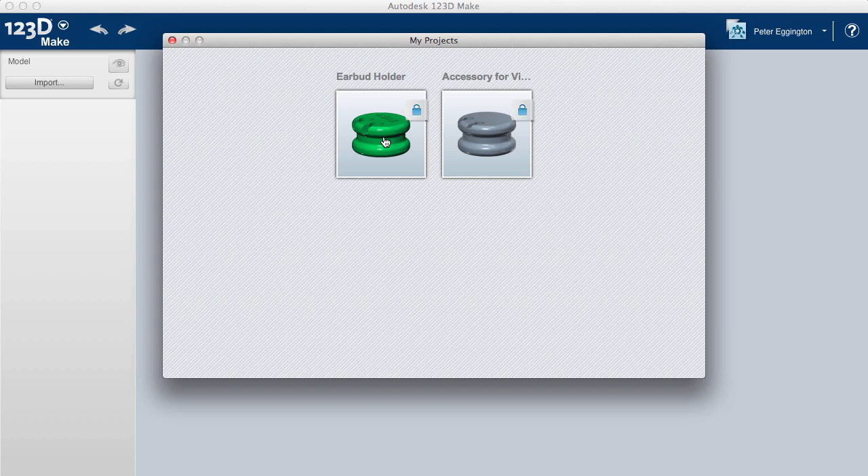To do that, I'm going to go down to Open, and open from my projects, and look in the browser window that opens for the earbud holder we've been creating. I'm just going to click on it, and that's going to download and import it into the 123D Make window.

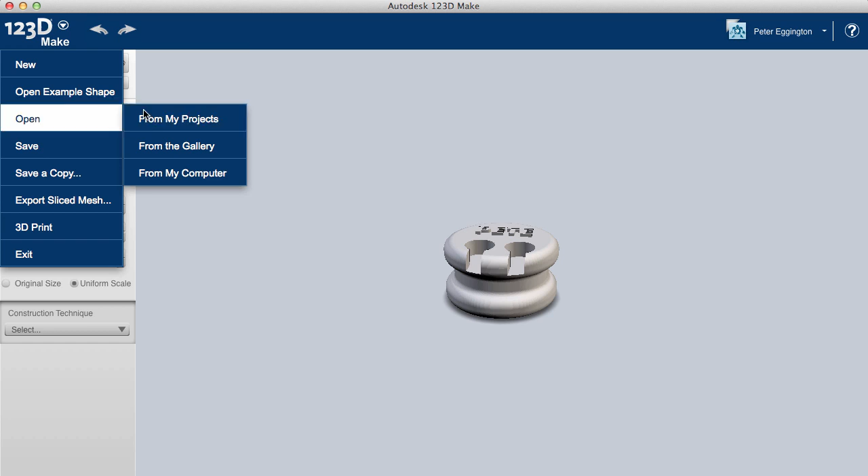Now, if you'd not saved it in 123D Design to your projects area, you can still access your model by going to Open from my computer, and then browsing for the location using Explorer or Finder to find the file you'd created. When you click on it, it'll import just like the other one has done.

It works fairly similarly to the other program. If I hold the right mouse button down, I can spin round and orbit around my shape.

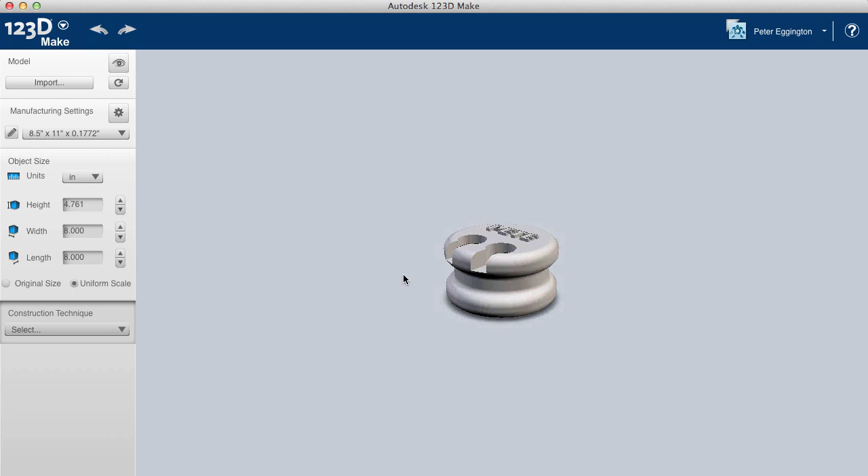By default, the program comes with a few materials already pre-input, but I guess like me you're going to want to start adding a few more, so I thought I'd show you how to do that, as it's not that straightforward. I've already created one here, acrylic 3mm, but I'll delete that one in a moment and show you how I've created it. It's probably the kind of material you're going to use a lot of if you do quite a bit of laser cutting at your school.

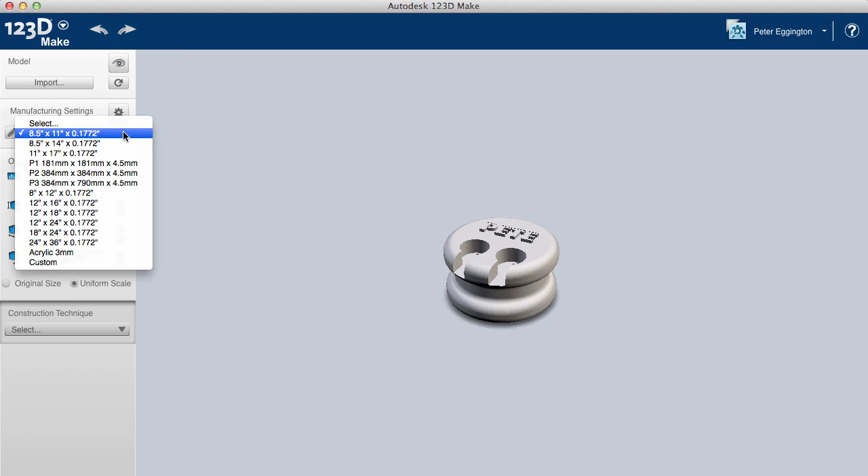So in order to make a new material, we're going to go to the little pencil icon, and I'll delete that one to start off with. The list on the left are the pre-input materials that come with 123D Make. To make a new one, we're going to go to the little plus sign, which is add new material, and it comes up as unnamed, so I'm just going to double click that, and type acrylic 3mm. Then we need to edit the properties of that material.

So for units, because I'm over here in the UK, we're going to go for millimetre. And the material size, that's going to be the sheet size you're going to use to cut this. It's probably useful to go for the bed size of your laser cutter here. So the height, I know most will do at least 400, and lengthwise we're probably looking at something like 600. But if yours are slightly different in your school, you can just edit those - if it's 600 by 600, or 450 by 450, you can just change those values to match your laser cutter's bed size.

And for thickness, nominally we're going to go for 3mm here. However, depending on your supplier, you might find this varies from 2.9 to 3.1 - the place I usually buy mine from does vary by colour sometimes. So it might be that you want to set up a material with different colours and their corresponding thicknesses, just to make it slightly easier for pupils and students.

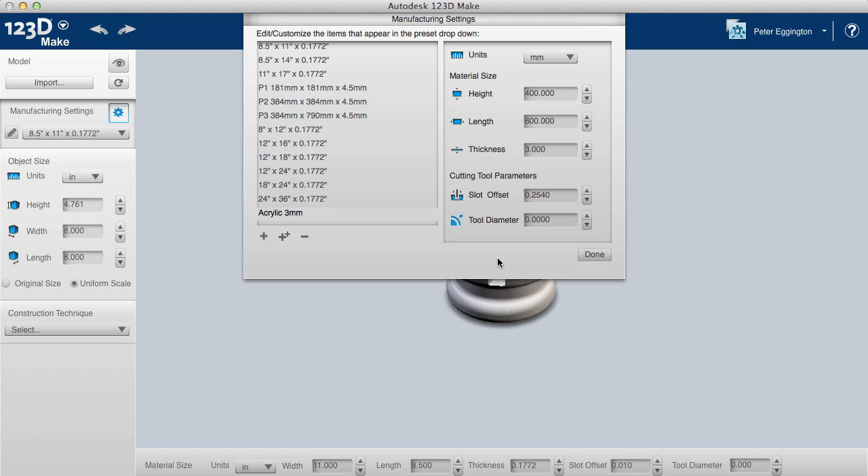The other two parameters down here, the cutting tool parameters, we're going to leave by default. The slot offset is just the amount of gap either side of the piece you're going to put in, and we'll see how it's going to slice it up in a moment, but I've used quite a few examples and this default value seems fairly decent. So when you're happy with that, we're going to click the Done button, and that's now input this new material.

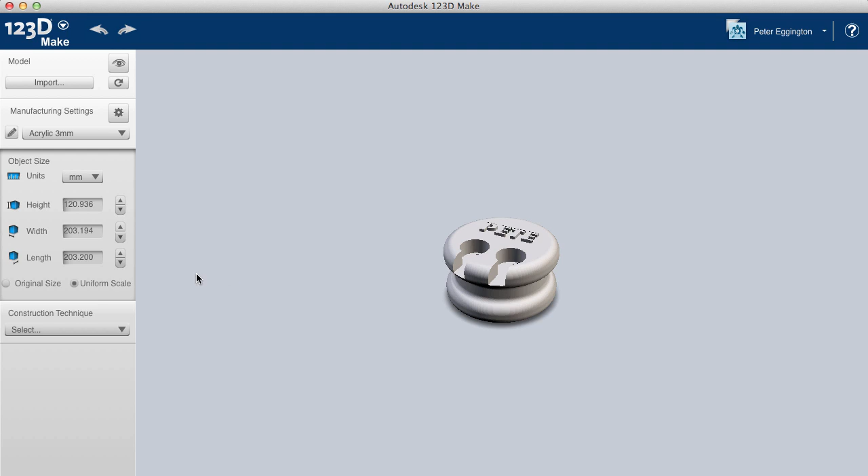So if I go back to my drop down box, I can see at the bottom I've got this acrylic 3mm, and the object that it's pulled in, we'll just reset it to millimeters, and you can see that it's not actually the same size as what I created in 123D Design, and that's because it's pulled it in using a uniform scale. So I'm going to select the original size button, and that's now pulled it in with the same size that I created, so it should be 60mm in diameter and something like 34, 35 high, and you can see that's the right sort of values we're expecting in the three boxes to this side.

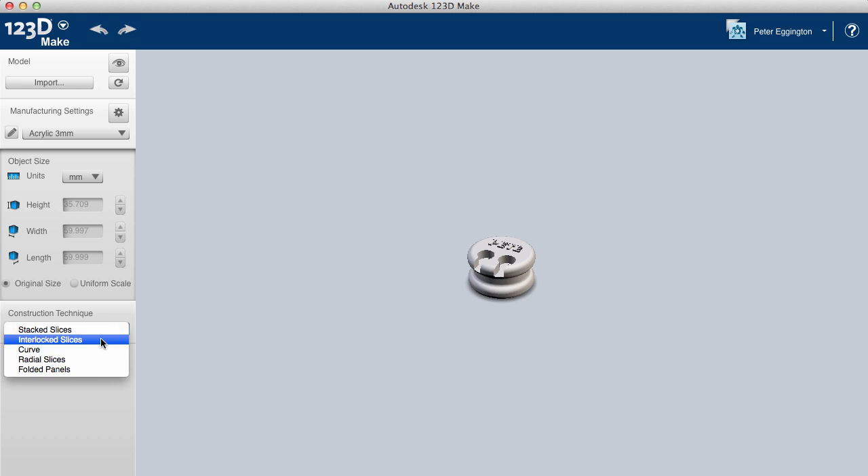So what we need to tell 123D Make is the way we want to construct our model. There are a few different options here. I don't want to go through them all in this video because it'll just go on for hours, so we'll just look at the stacked slices, which is probably one of the more common ones. If I rotate, you can see this program has sliced up our model into various slices of 3mm acrylic and laid them out onto a 600 by 400 sheet. It also numbers each one for you, so when building it up, it's simple to find the next piece because you just count upwards, and there should be 15 parts altogether.

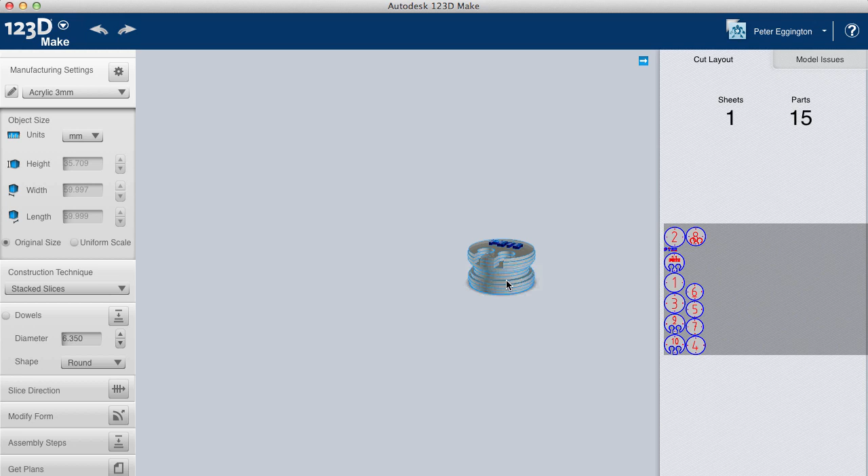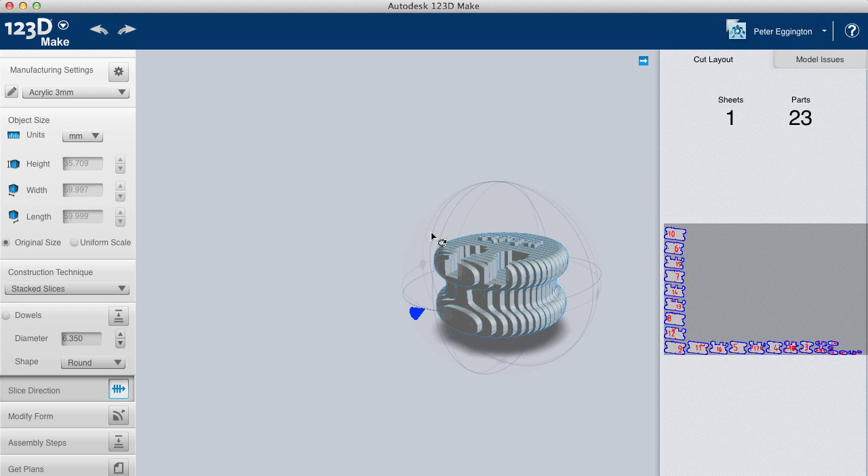What we can do as an option, by default it'll slice in this orientation, so it'll just stack them up on top of each other. It might be for some models that we want to change this slice direction and have it coming from this way instead. Now for this model it's probably not the optimum idea, but depending on the model you've created, you might find one orientation works better than the other. So I'll just try and put that back to what it was before.

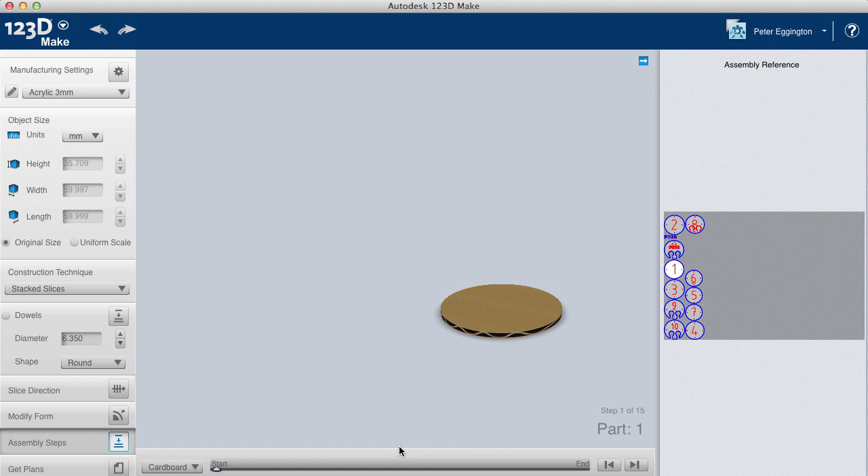We can also go down to the assembly steps, and if I go back to the start on this item and scroll through, it shows you the steps and also highlights which one it's asking for next. You can see if I go back, we've started out with piece number 1, 2, 3, and so on, going up. The blue lines, I guess you could push some bits of wire through or something to try and hold them all together, although if you're using cardboard like this model, you're probably just going to use some type of glue to stick it all together.

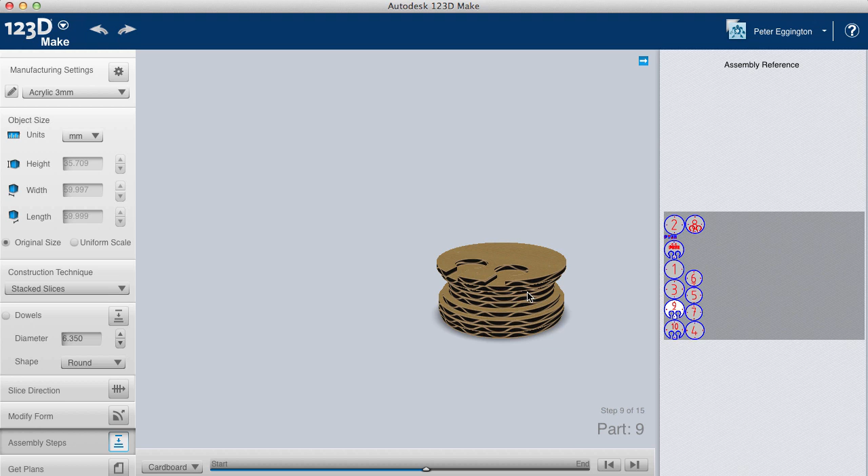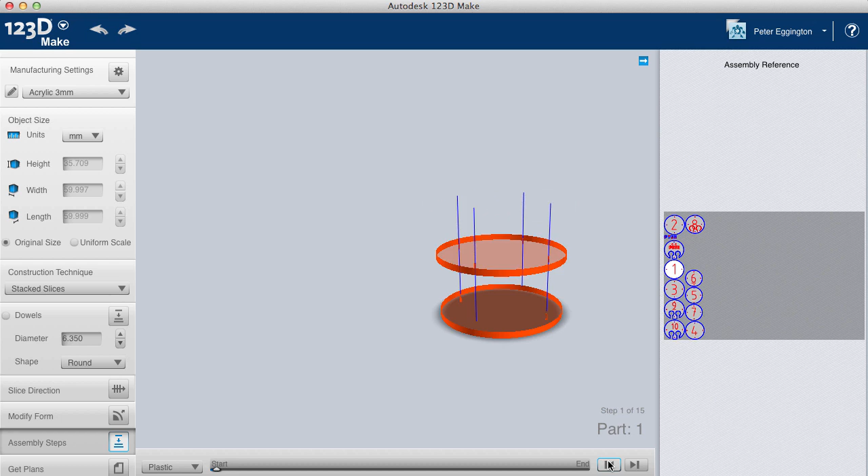So we'll just go through to finish that off, and you've now got your model done in cardboard. There will be an option here if you want to change the material just so it looks slightly more realistic, and you can play that back through, so when you do come to build, if you're struggling, you've always got this little animation to help you out.

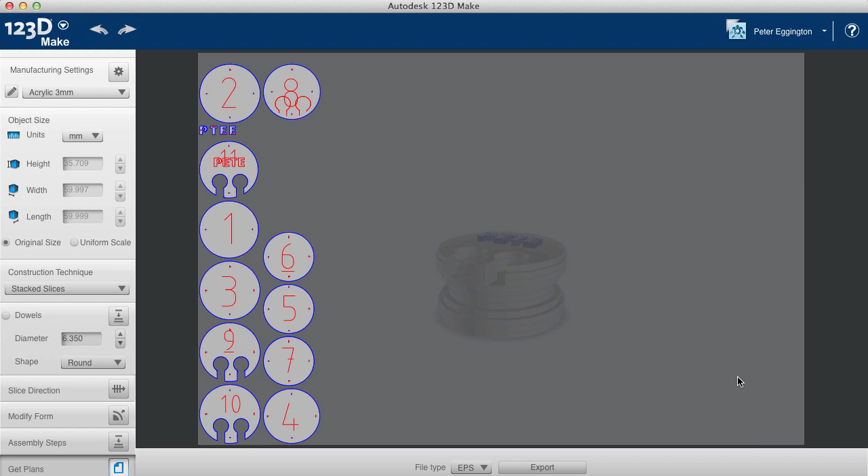There's also the Get Plans button, which lays it out on your screen and allows you to export it as either an EPS, a PDF or a DXF file. If you're using lasers, it might be useful to be able to export a DXF. Most lasers will probably recognise an EPS format as well, and I've not really come across any that do PDFs, but either there's some around or it's just another way of transporting it around. So a few little steps in there, and we did say we'd just look at maybe a few more construction techniques.

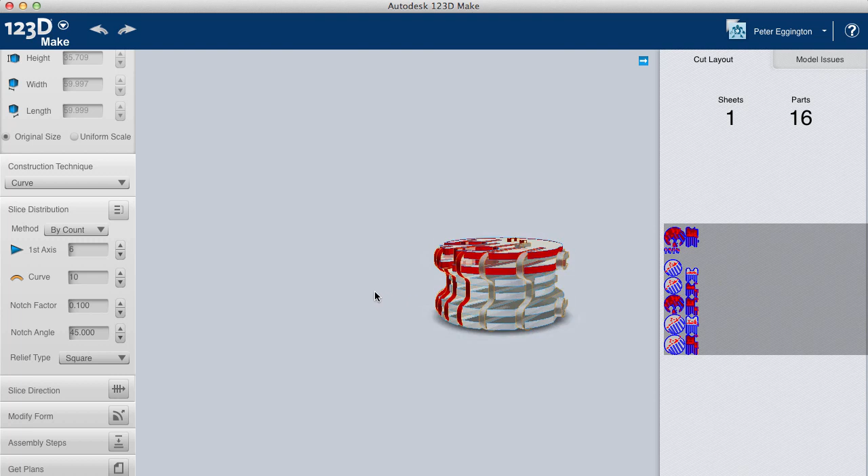So if we just look at things like the curve, again you can see it slightly spaces out those slices and holds them together with little uprights, and again for this particular model it's not the best solution.

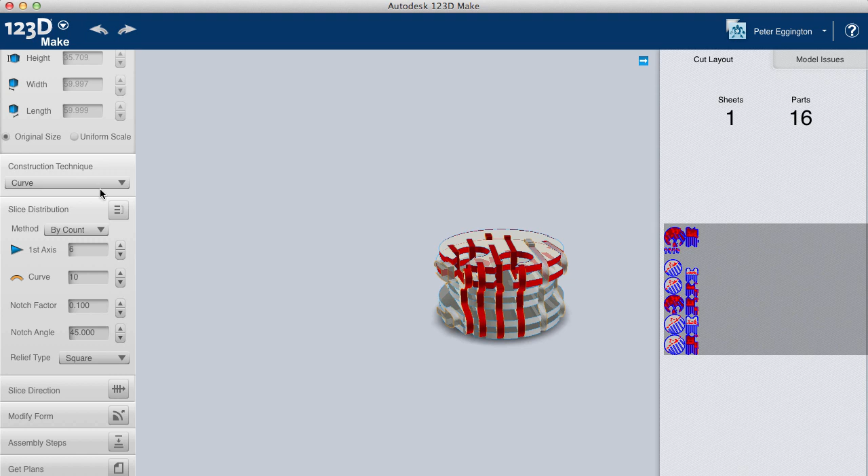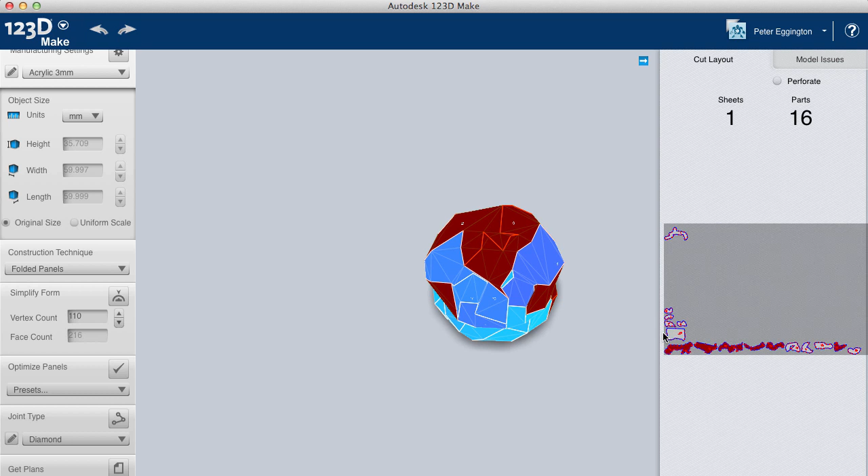And again there's a really obscure one which is folded panels, which would still cut you out or print you out, and obviously you're not really going to do this in 3mm acrylic. This would have to be more something like card or paper in order to create that form. So yeah, just another quick one for you there.